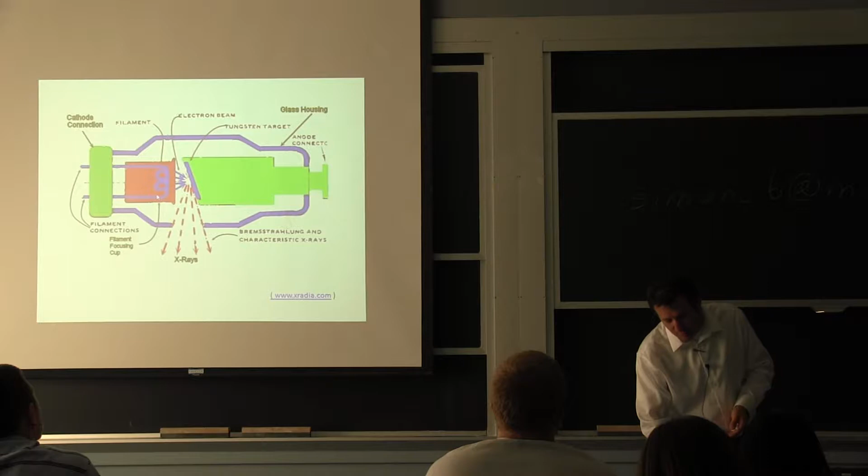The only difference as opposed to the scanning electron microscope is a higher voltage. It's of the order of about 200 kV as opposed to 20, 30 that you'll have for a regular SEM. So you can see with this amount of energy that you'll heat up your sample here, which is another piece of tungsten. The reason for using tungsten is everything heats up so much that you want to try to minimize thermal fatigue and oxidation. So what we were working on is essentially preventing the formation of cracks, either in the target here, this tungsten disc, or just right underneath it.

So in terms of design, what you need is something that is this high temperature on the surface, because you know it will heat up. The beam is so strong, there's no way to avoid it. But then behind, what you see as the green is essentially a copper block that has internal cooling to try to drag the heat generated from the electrons hitting the tungsten.

So this whole system, if you're running it in steady state, you keep providing electrons, you keep generating heat, that's great. But when you start turning it on and off, the surface moves from tension to compression every single time at very high frequency. And that's why they only had a few months' worth of life on these sources that were worth a lot of money, and that was not acceptable. So we got involved and essentially tried to work on not only reducing the peak temperatures.

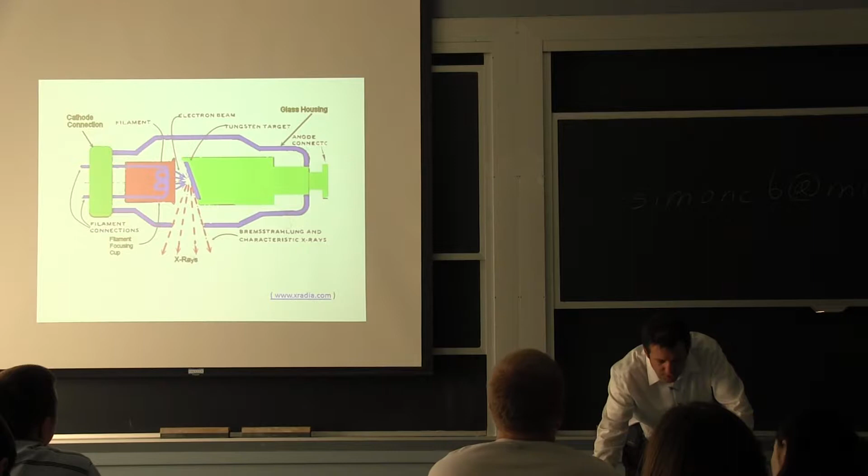So here you're looking at the temperature. The target is at an angle. The reason is, say the electrons are coming from left to right here, and then they emit the X-rays at an angle, and that's what's used here for imaging purposes. So if you try to minimize that surface temperature here, that's already a starting point. The other thing was to try to make it a little bigger, and also in the end to try to not have it all centered.

You try to distribute the field so that there's not one hot spot, but it's rather a hot surface. That's kind of the general idea of what I was trying to do. But when you try to do all of this, ultimately, you can make this much better, but it will cost a whole lot of money.

So at the same time, you do try to be reasonable in terms of production, in terms of the material you use, and that's why we were building a model to look at stresses, and at the same time, we were looking into literature data for the material properties. And ultimately, you try to match the best you can the capacity with the demand, the load demand, in this case, the thermal fatigue. And there were two different modes of fatigue.

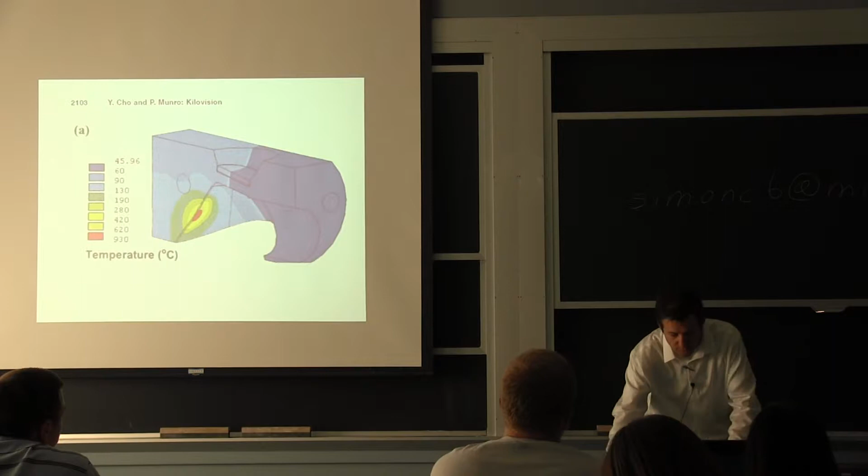One was when you shut down the machine completely. That's a very large cycle, because you go from that surface that's here at 1,000 degrees centigrade, and then all of a sudden it goes to ambient temperature. And then you have these very high frequency cycles, and depending on the design, the thickness of that tungsten disc that's on the surface, you have the issue with one or the other or both, or you try to avoid it enough that you get the life that you're looking for.

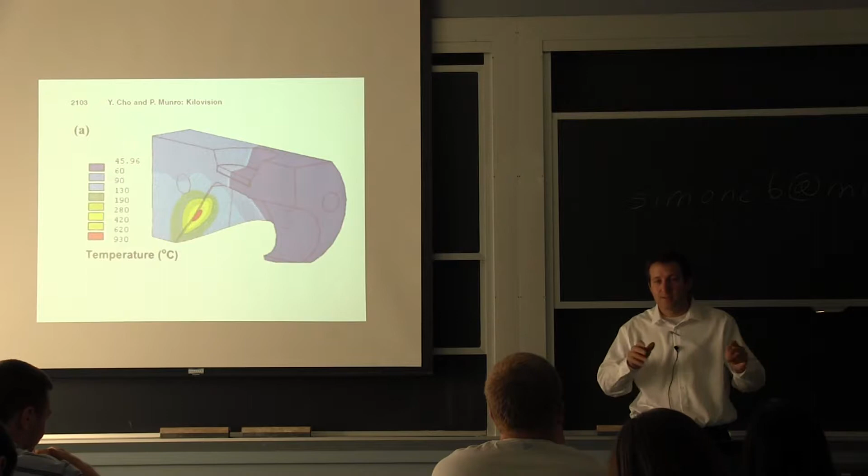So it's not atypical to have to work with the two aspects, the material resistance and what is the demand, and try to get that optimized in detail. So that's an example of work. These are just examples of cracks that you can get on the surface.

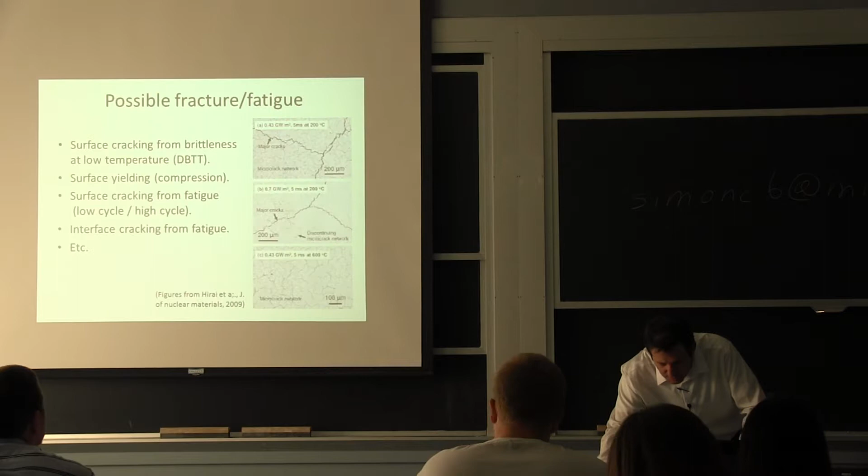And if you have a lot of very small cracks, to some extent, it's good because it allows you to accommodate more differential strain. You're dealing with different material. There's copper underneath, it's tungsten on the surface. It's a different thermal expansion coefficient. It's a different temperature. Turns out the copper expands more with temperature, and that's a good thing because it's going to be a little cooler on the back.

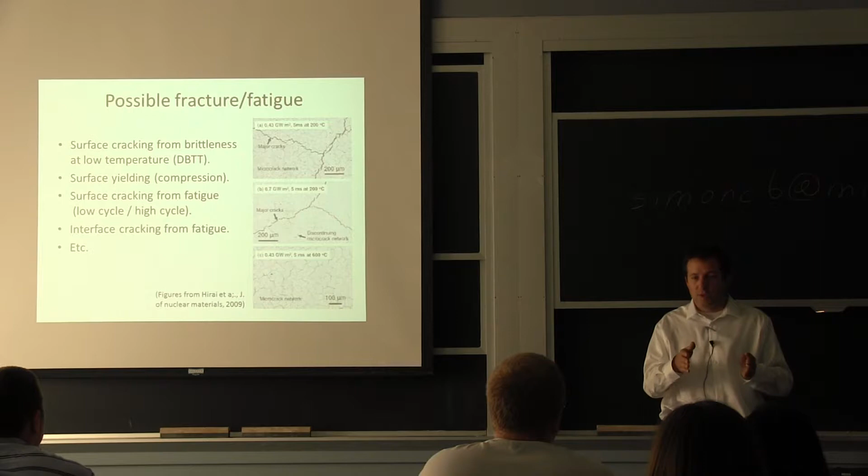So that's kind of a way to try to have the physics working for you, where you know the tungsten's going to get hotter, but at the same time the thermal expansion coefficient, so the expansion per degree of heating, is less. So you end up balancing things out a little bit.

The other project I want to talk about is these blowout preventers, and that speaks to what happened with the Deepwater Horizon, what happens just about every year in the Gulf or onshore in Texas or Louisiana. They lose control over the well and they have a blowout. Typically, the release of pressure when things start to flow makes the well collapse. The whole casing breaks and it shuts by itself.

The Deepwater Horizon was very unfortunate because there's just so much built-in pressure and resistance through the well that it just kept pulling out, and it kept producing the oil and gas at the same time. So again, a lot of times you'll have a blowout, but it's not as consequential. It's just going to collapse on itself. So what I want to talk to you about a little bit is how we shut those wells. And I have a video.

So the trouble is you have this drill pipe here going up and down. And the way you drill is you pour drilling fluid, drilling mud, from the inside of that drill string, and then it goes all the way down to the bit and collects the debris and floats them back on the outside, what we call the annulus. So that's the way to essentially get all the rocks, all the pieces, all the dirt out of the system. You screen it, and then you recirculate it back.

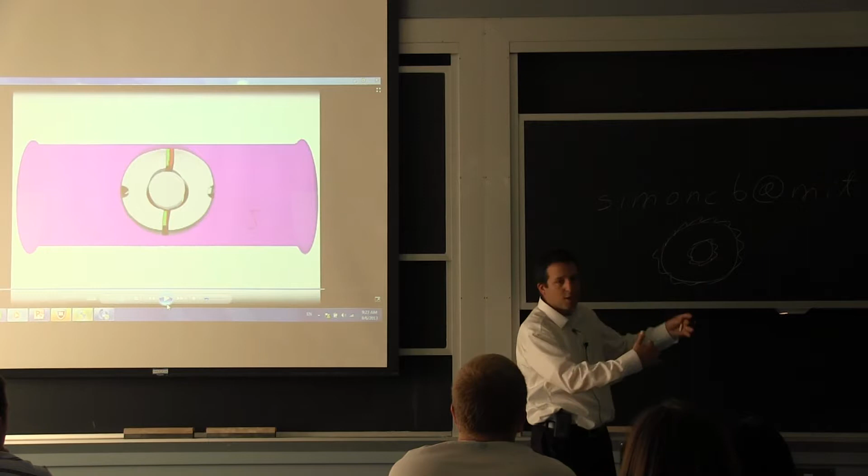And then you also need to seal in the center between the ram blocks and the drill pipe. It's not the only way to do it, but it's kind of the only way if you're going to keep your drill string. In the Deepwater Horizon event, they also had another set of these where they were trying to cut the pipe altogether and seal it. So you only have one interface in that case, but that didn't work either. There's always redundancy, but it doesn't necessarily mean that you have the time to activate all the devices and it will work.

This case here, I worked on maybe 3 or 4 years ago, and what happened, as you can see, the drill string was not in the center. So the first thing that the BOP needed to do was to push it by just a little angle here on these plates that are green and red. It turns out not all designs will allow you to do that, but it should be there, because there's no way you're always going to have the drill string right in the center. It's also something that did happen in the Deepwater Horizon.

There are a lot of government reports that talk about all the things that went bad. One of them is they realized they had flow and it was flowing a lot. So if you have flow here, it's very hard to seal with the rubber. You're going to erode the rubber very, very quickly.

When I said high pressure, these things are rated to about 15,000 psi. By comparison, the water pressure in a home is typically 60 to 80 psi. So you're talking 100 times that at least, depending on the scenario. It's not easy. You can't just use rubber. And that's why in that schematic, all the rubber you see is embedded in steel, so it doesn't extrude right out.

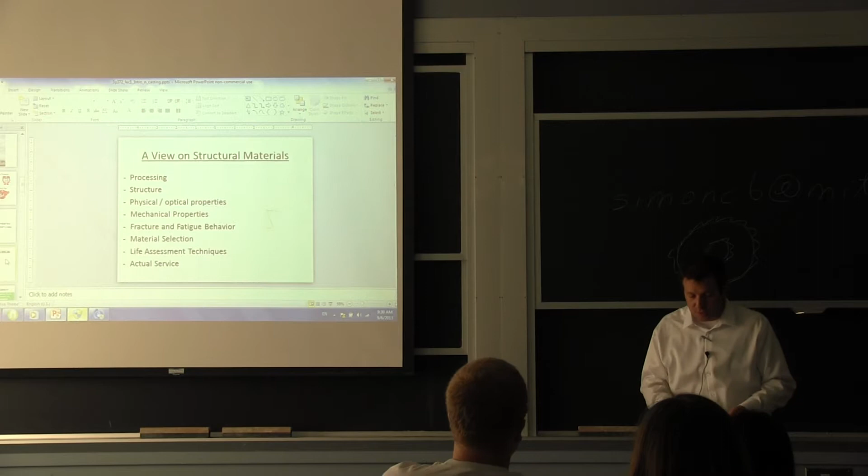So some of these topics come into 12 modules, the same way that this semester we're pretty much dealing. Professor Hager is doing material selection, and I'm doing probably mechanical properties and physical properties, if you take the environmental as part of the physical properties, and a little overview of processing. Everything else, life assessment, dealing with cracks and details, there's a whole module on that, if that's something that's interesting to you.

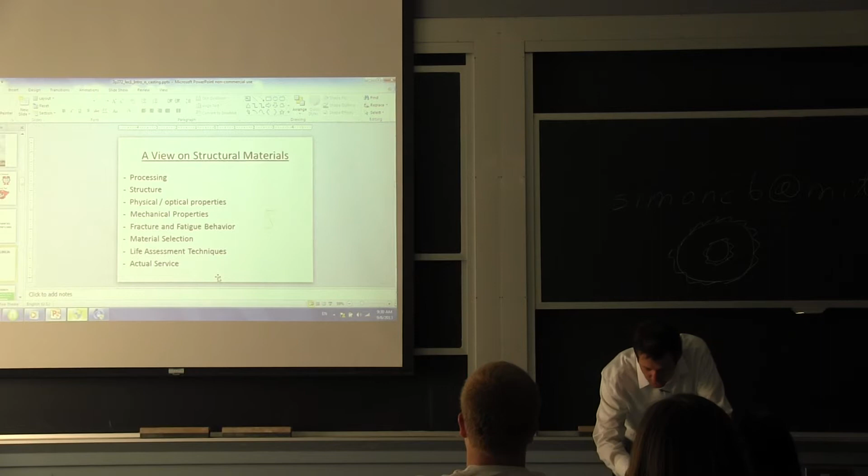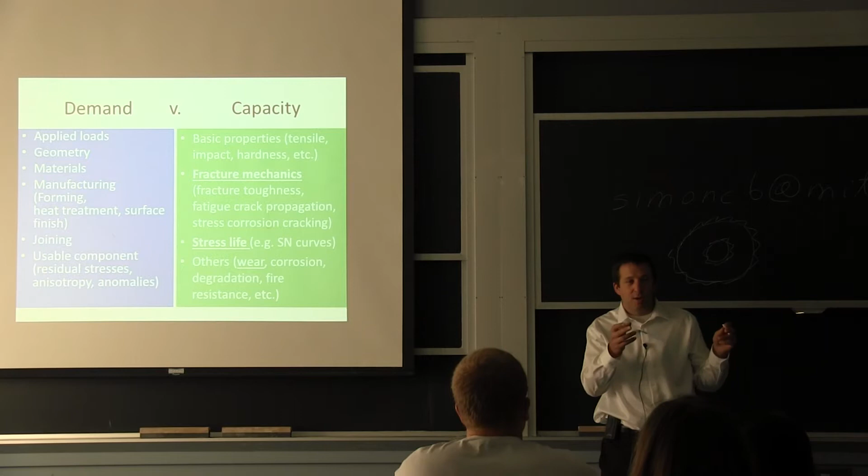Okay. So demand and capacity, that's what I came to you with in the introduction when I was talking about the X-ray source design, where you want to try to get a match. This is a way that I always use to do work. Are we unsure about what the load is going to be, or are we unsure about how good the material is going to be? And that's where you always have to think about it both ways.

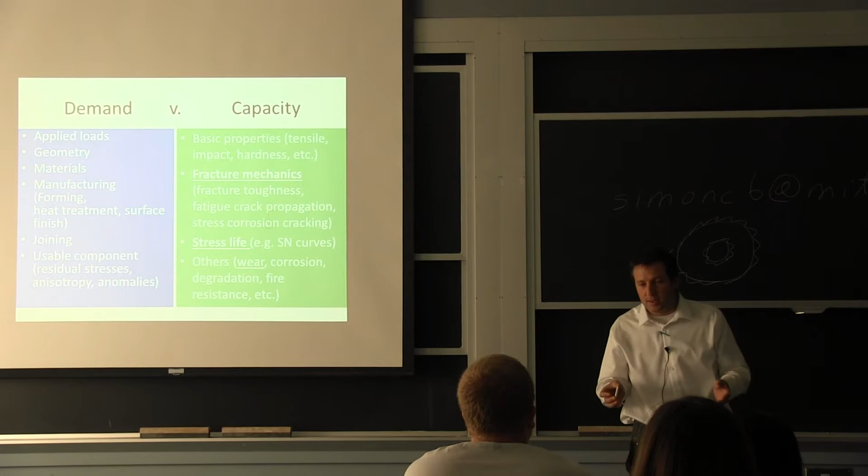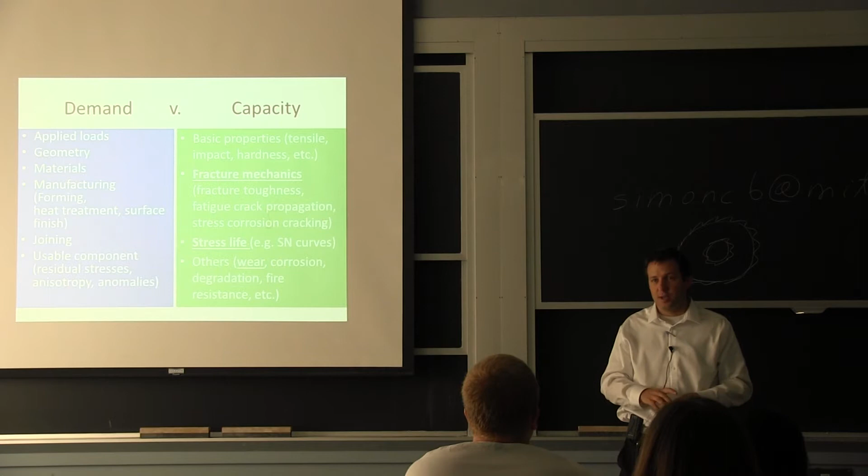And that's where a lot of people in our field of consulting have a problem, because if they have a mechanical engineering background, well, they know the demand. If you're really a pure material scientist and you've done a lot of processing and looking under the microscope at what it looks like, you know the capacity. But ultimately you need to meet both, and then you start talking about cost. You start trying to optimize other aspects than just the engineering performance. We've covered already what we're going to talk about this semester.

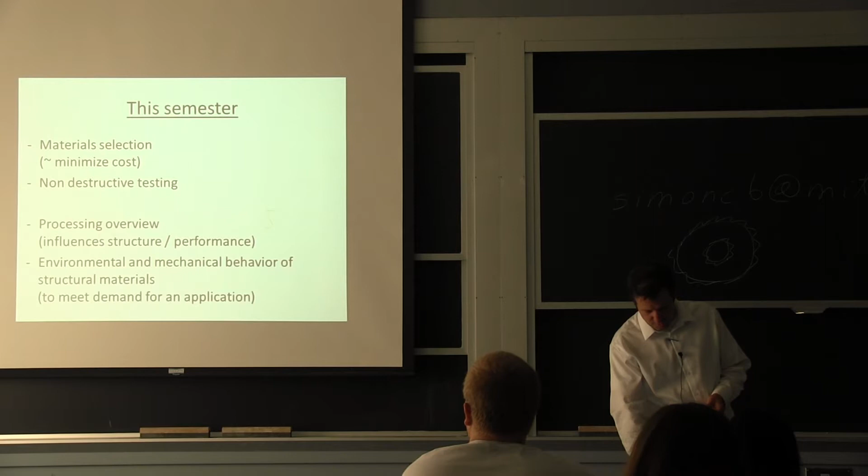So, casting. I want to say it right up front. I think most people know castings of metals are not the most common parts that we see. Most of it is being cast and then processed to blend the microstructure and get the different shapes that we want. It's relatively rare, especially for high performance parts, that you will just take the melted metal, throw it into a mold, and here's the part. It happens in aerospace. We use a lot of aluminum castings, but until recently anyway, they were only secondary structures.

You can't use it as part of, you know, the fuselage or the main frame because you don't know exactly the properties. You can't design it to the limit because there's going to be a lot of variation. This example I'm throwing in is one example where you can use it. It goes on an ATV, a utility vehicle, I've got some images of it if you're not aware. Weight is important, but at the same time, you don't want this to go flying. It needs to have weight.

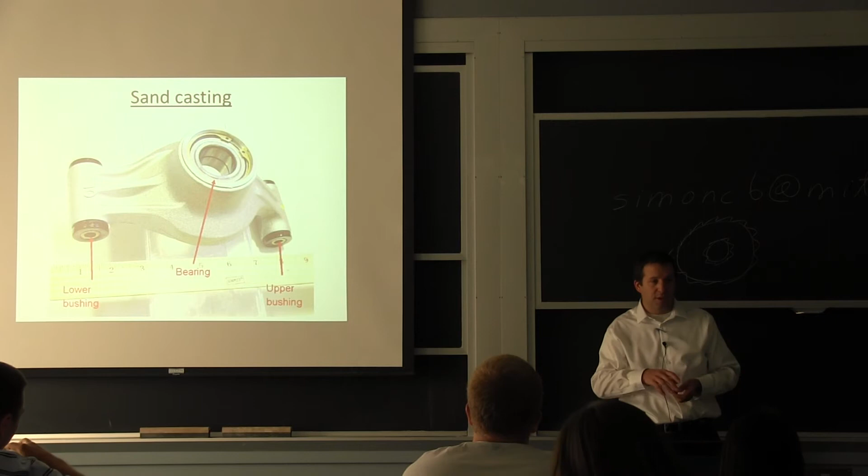It's cast aluminum because you can get a very nice complex shape in just one operation. You make the mold and you pour it in, and if you're willing to make it bigger, that means your stress demand is going to be low on that part, and you're good to go. Ultimately, they do some machining after the fact to be able to put these bushings in and to put the bearings. But here you have reinforcement ribs, and you can make it a very nice shape and smooth to avoid geometrical stress risers.

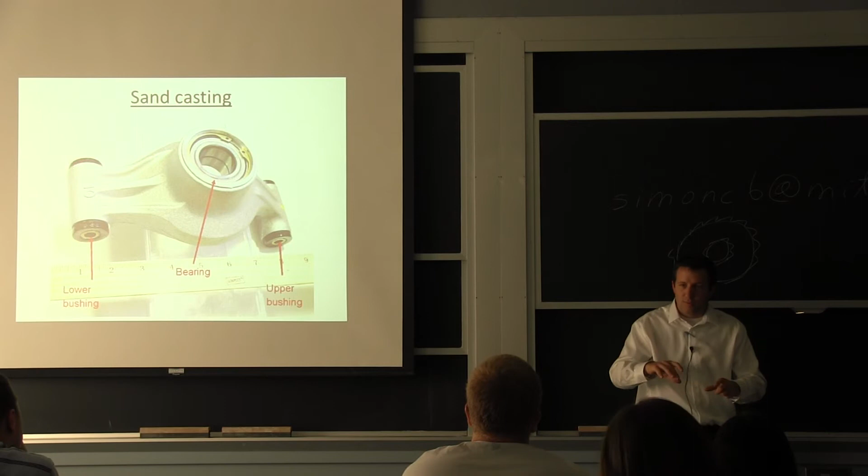You know, you could maybe make this with a flat bar and a round bar, and weld the two together and make it out of steel and be done with it. But in this design, everything has the curvature, the rib reinforcement, it's all smooth. So there are a lot of advantages of doing it that way in certain applications. So with that very little introduction,

when you take the molten metal and you throw it into a mold, the mold is always cooler. There may be an exception when you do single crystal for turbine engines where you really keep everything molten and you control the solidification very, very slowly. But in general, you take very hot metal and you pour it in, and you essentially rapidly form a solid, so there's solidification at the interface with the cold mold, and you typically end up with multiple types of structures.

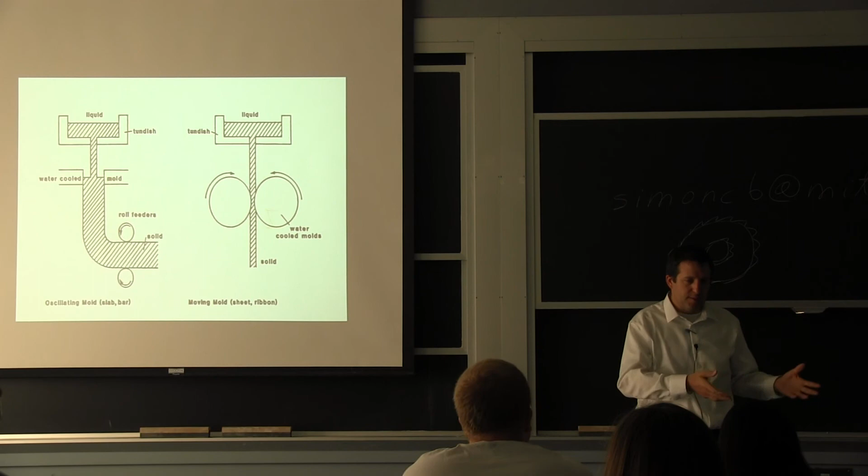You can do these big billets, but you can also do sheets. If you're going to make aluminum foil, you're hoping you don't start with a billet that you manufacture this big. They will still do it sometimes, but if you can make a plate, a strip, you don't have as much thickness reduction to do down the road. So these are two main ways to go from the molten metal and process it in a billet as a continuous process.

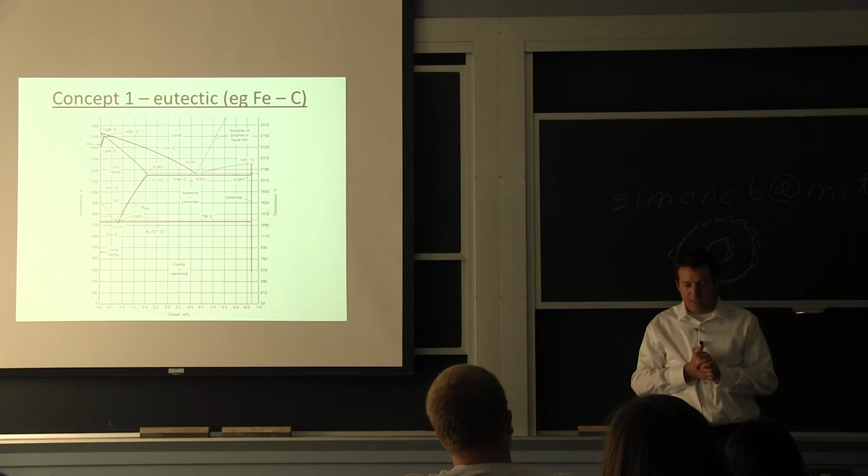So I've already started talking about what you're trying to do here. You're trying to get the best structure, and a lot of the physics is not really working for you. The metal wants to separate. And you have some familiarity, I guess, with phase diagrams, right? And I'm showing you here the iron carbon phase diagram in concentration. So here on this side, it's 100% iron, and around here you have 7% carbon.

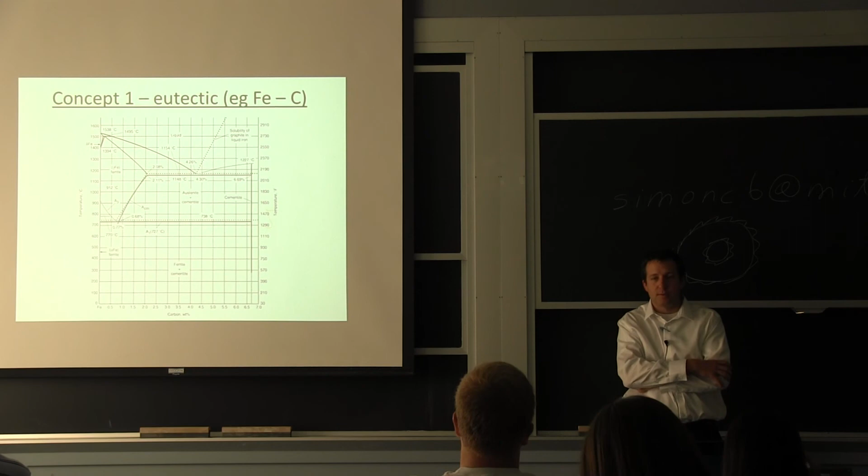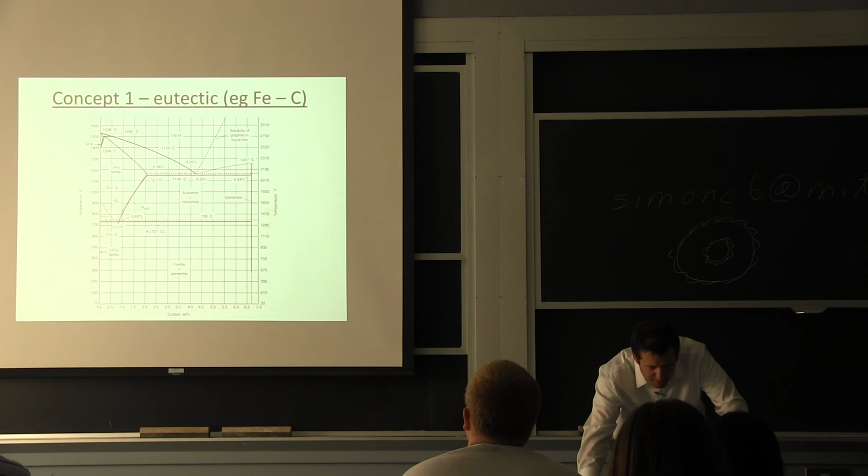Traditionally, cast iron was relatively popular for the reason that if you go right here, at a concentration of about 4 1/4 carbon in iron, your liquid will remain down to the lowest temperature in this whole diagram. So pure iron, you'll have to heat it up above 1500 centigrade before you melt it. And if it's got carbon in it, you can get that down to about 1200 centigrade. So it's a significant difference when you think in terms of technology.

It's very hard to have molds that will hold material at super high temperature. The lower the temperature is, the easier it is to have refractories that will hold your molten metal, and the amount of heat you need is less. So there are a lot of advantages to adding carbon into steel to be able to melt it more easily, and also when you cast it into molds, you don't have as much of a temperature drop. And that's the concept of eutectic composition.

So the eutectic, when you have a two-phase alloy, is the lowest point in composition where you'll go straight from a liquid to a solid. It's great because if you have the exact eutectic composition, you wouldn't have all the segregation issues that I was talking to you about, because in terms of the thermodynamics, the whole alloy is perfectly happy in the liquid state with that iron and 4 or 5% carbon. And then at one temperature, as soon as you go across it, everything wants to become solid.

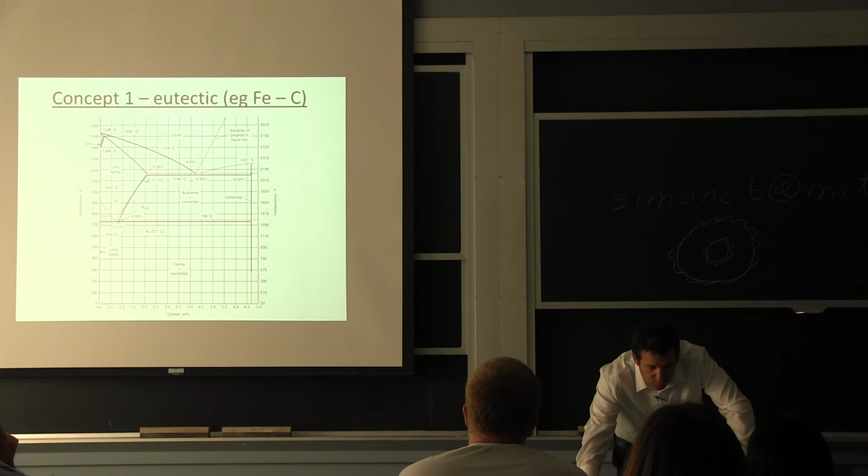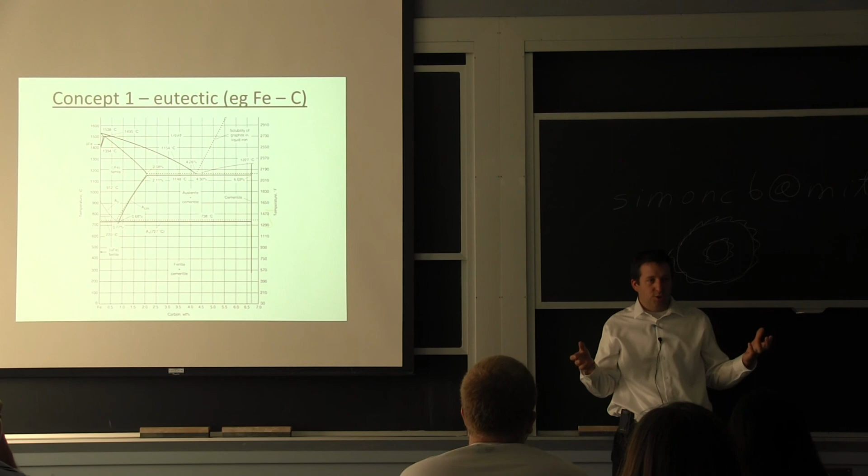Yeah, but it will separate. It will separate in this phase here, so an iron-rich phase and a carbon-rich phase, but all at the same time. So it's a way to minimize the segregation also, but it makes for a relatively brittle material because you put a lot of carbon into it. You have a phase that's very brittle, and that's why cast iron has a lot of limitations. There are ways to